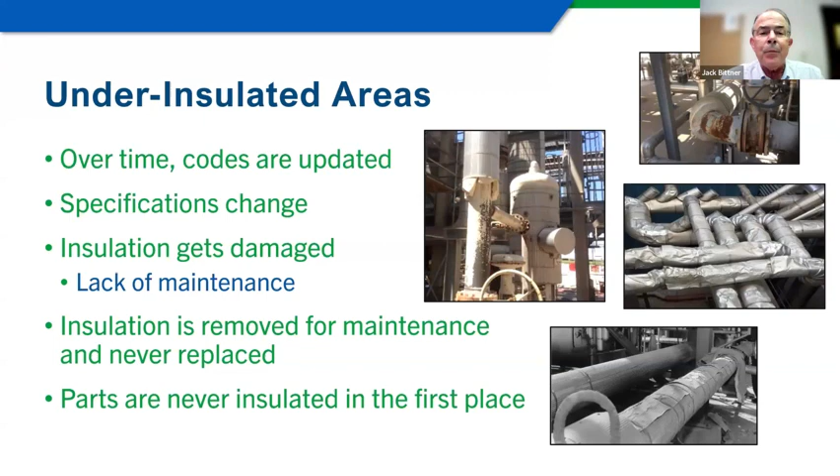But there are insulations and coatings for pipes today that really do go a long way to reducing corrosion under insulation for those types of applications. Rather than having a standoff and letting all that heat and energy go into the air because you're worried about CUI, you don't have to do that anymore. You can actually insulate that pipe or piece of equipment and not worry so much about corrosion under insulation with some of the new technologies that are around today.

So this slide I actually took out of the presentation or the study, and it is the cost that was calculated for under-insulated areas. The study looked at the current year, which was based on 2022, though it was actually completed and published in 2023. It then looked back 5 years and forward 5 years for an 11-year window. Rather than get overly complicated, I'm just going to focus on one year, the base year 2022.

So the bottom line is, if all the under-insulated or unmaintained areas of facilities were actually insulated, in one year alone, the combined total savings in dollars was $2.5 billion. And this is sitting there.

It's available for use, and we've got insulation appraisers who can go do energy audits and tell you, if you insulate just this 6 feet of pipe, this is the return, that valve over there, this is the return. You can document what you get. We've been doing this for years—this is not anything new that the industry's had.

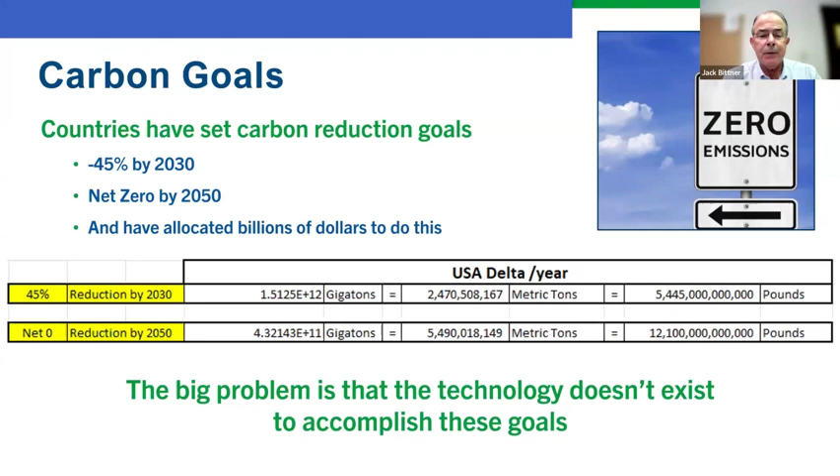We've all got the green paths to reduce emissions - green energy, solar and wind. That probably includes a battery backup at some point. Geothermal, hydrogen, hydroelectric. If you look at these projects, we've only got 5.5 years left, so to reduce it by what we're talking about, some of these projects aren't going to be anywhere near complete by 2030 or by 2050.

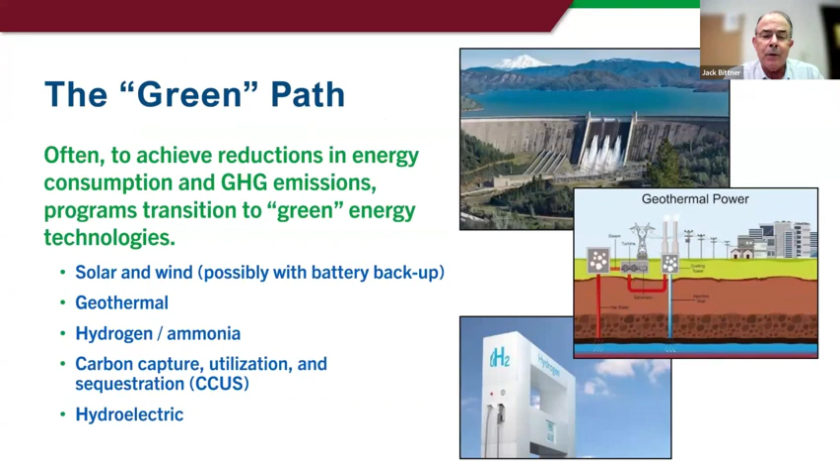The challenges are huge. Just the approval process and construction cycles for some of these projects, and simple ones like windmills, take a long time. They don't happen tomorrow. Meanwhile, you can insulate that pipe over there this afternoon. They take significant capital. Some of the technologies are still being developed - we don't have them yet. And some don't provide 24/7, 365-day solutions.

We talk a lot about, oh, you can plant trees and get this much carbon reduction. Well, a tree, you plant it, it's not contributing to the carbon reduction according to the formulas I looked at and the different models. They figure that tree's got to be 10 years old at least before it's actually doing what it's designed to do as far as reducing carbon. 10 years. Insulation, do it today, you got a 10-year head start on that tree.

Windmills, similar deal. It takes up to 4 years to get a windmill permitted, built, and actually running. So insulation now over a windmill has about a 4-year head start. And insulation lasts for the life of the system. Meanwhile, the windmills are good for 25 - I've seen numbers from 25 to 30 years. And trees depend on, I don't know what the survival rate is when you plant a whole bunch of them, but the insulation's there.

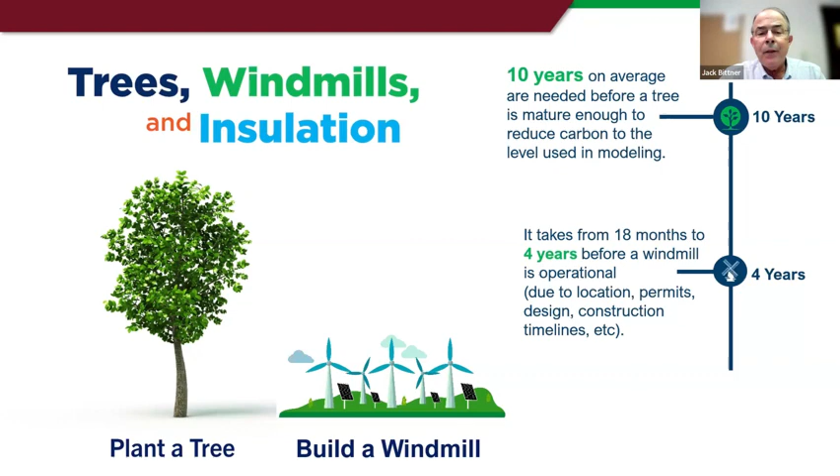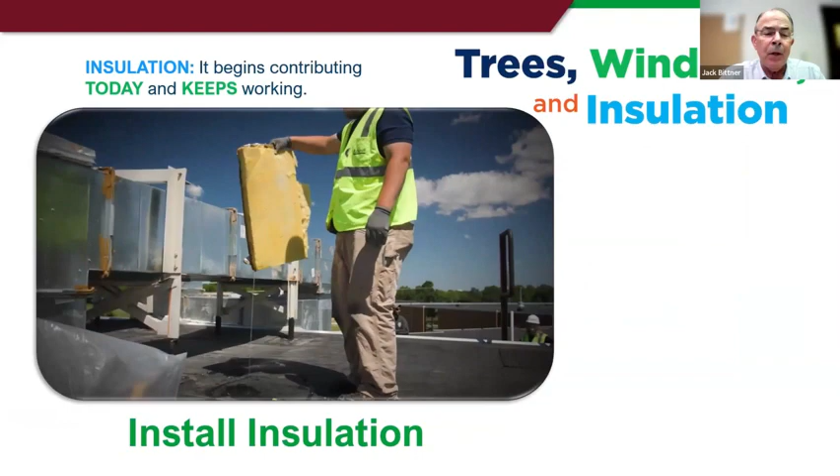It works day after day after day. So it keeps contributing. The quick answer is install insulation. We have it, it's here. We know it works. It's been around for thousands of years. Yeah, it's not glamorous and it's dusty.

Here's a guy taking off - he's actually doing maintenance on some rooftop ductwork, taking off old wet insulation and installing new. But it works now, and it keeps working.

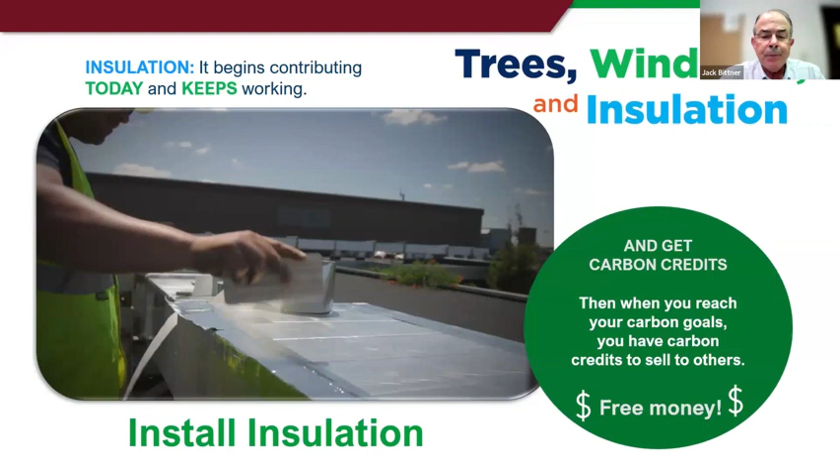And you also get carbon credits. Those are becoming a bigger and bigger deal. So when you install insulation, you reduce your carbon, and you can actually begin to accumulate carbon credits, which gets to be free money as we look a little bit down the road.

Insulation - to prepare for this presentation, I looked at all kinds of things on the internet of people recommending what we need to do to reach our carbon goals. Technology to remove CO2 from the sky and atmosphere by putting something up there to reflect the sun out into space. Another group wants to build vaults to bury trees underground so they don't release CO2 as they decay. Some of the crazier ones - there's a group advocating for a mandate on a global ban on having children because each human has a carbon footprint. Another guy says, well, let's just genetically engineer smaller humans to reduce the footprint.

And then some want to eliminate beef, and I'm like, no way, man, I like a steak too much. Just insulate your pipes. It's here, it's technology that exists. We have it.

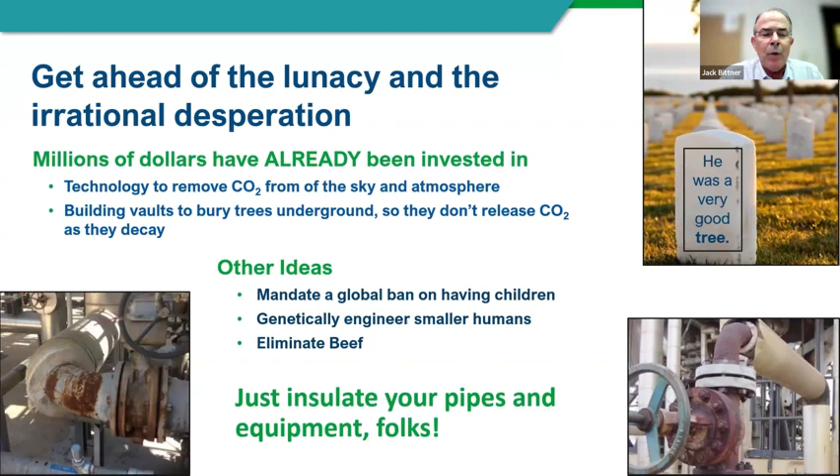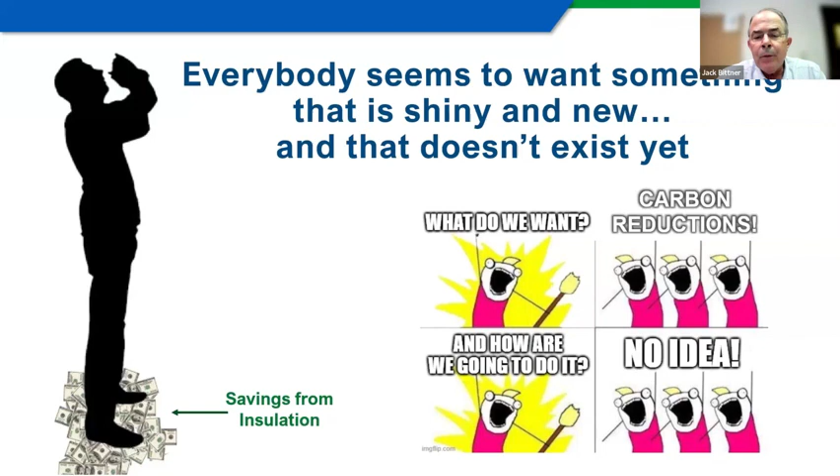So everybody's looking up to the sky, waiting for something shiny and new to fall out of it that doesn't exist yet, while we're standing on savings from insulation that the benefits already exist. They're proven, they're here, all we got to do is do it. And they're walking over dollars while looking around for something that we just won't have by 2030.

And if we're serious about doing this, let's start talking about insulation's impact on carbon emissions.

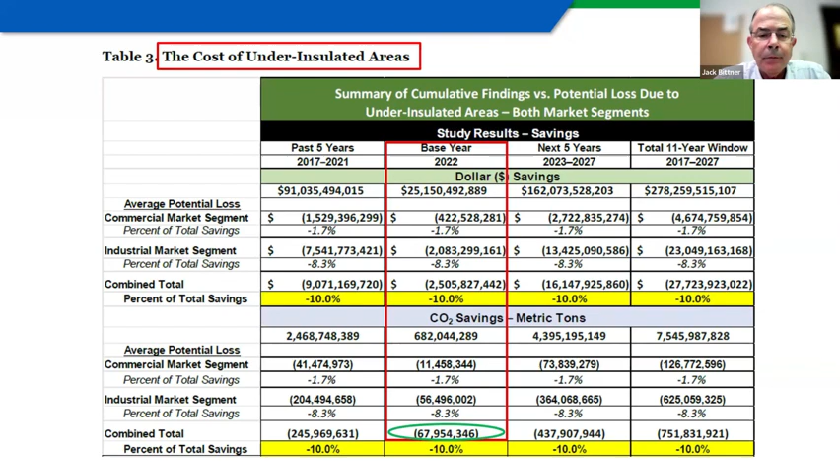Next one. So let's take that 68 million metric tons, and that's just a year, and that's the equivalent of 14,000 windmills. There's only about 9,500 windmills in the US today operating anyway. So you could either insulate the under-insulated areas or build 14,000 more windmills, but it takes four years to do that. That's right, so now we're looking at 2028 just to reach the goals.

Let's just start with what we know. Yeah, do this other stuff, but insulation, you can do it now.

So by 2030, if you insulated every year those under and uninsulated areas, and the damage - insulation gets damaged all the time - that 68 million ends up to, by 2030, if you start today, 476 million metric tons. And that equates to about 98,000 windmills. This is easy. It's here. You don't need a permit for it. Next one.

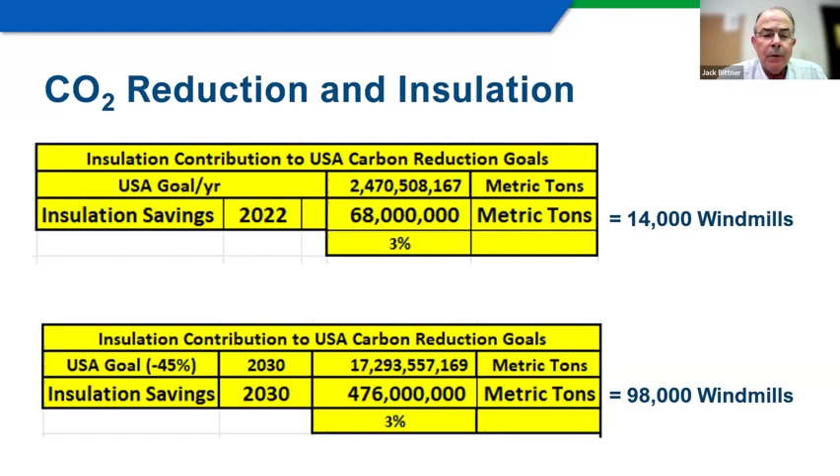So I mentioned carbon credits a little bit ago, and carbon credits are generally created by governments to limit the amount of greenhouse gas organizations can emit by placing a cap on them. You've heard of cap and trade, and there's actually a market for carbon credits. The way it works is a company that brings its overall emissions below what's required by law can either keep them or sell them to other companies.

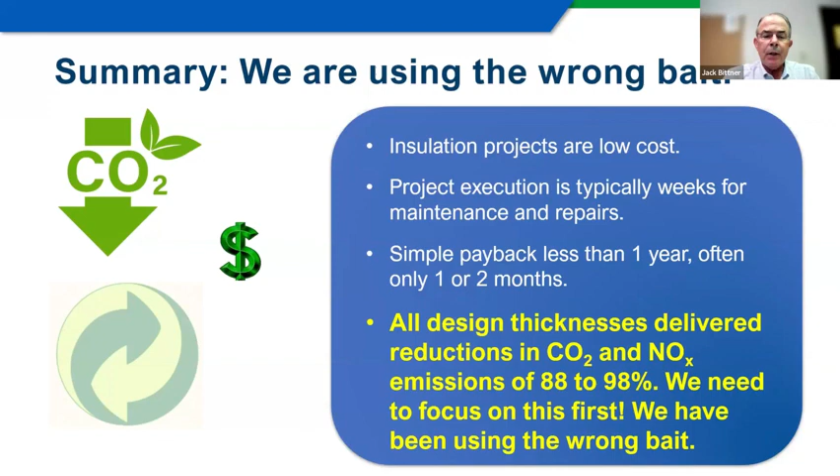So let's look at the next slide, Aaron. Okay, so we now have quantified actual data from that report to support the facts that insulation does actually reduce carbon, save energy. You know, the cheapest energy is the energy you don't generate in the first place, and proper insulation helps you do that.

We certainly have plenty of tools available today to help quantify both the dollars and the carbon reduction. There are certified energy appraisers certified by the National Insulation Association. There's some really good software to do the calculations based on some of the data you get when you go out to do the appraisal, which will give you the answers for the carbon reduction as well as the dollars and payback.

We've got a carbon savings technology that actually exists in insulation. Yeah, it's not pretty or shiny, but it's here and it works. You can do it tomorrow and you don't need a permit. You don't need any of that stuff. Just do it.

So these are dollars that are plentiful and laying on the ground, like leaves in the fall, and we're walking over them looking for something else, but it's here. We can do it now and actually take some steps toward the 45% reduction by 2030 or the net zero by 2050. Insulation alone won't do it, but you know what, nothing alone will do it. It's going to take several different technologies and options - there is no silver bullet. In addition, we offer the opportunity to collect some carbon credits and put some in the bank.